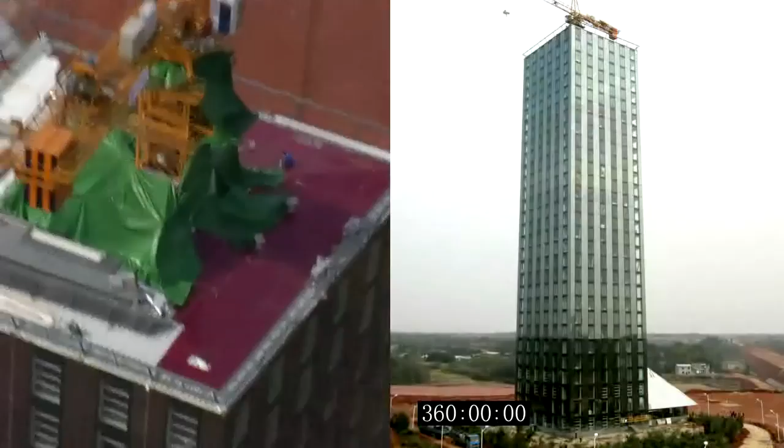That's it. Sounds it works, okay?

This short video, which we put on YouTube, has over 5 million viewers. But much of the attention has been paid to how fast we can erect a building. Here I'd like to take you inside T30, which means at least a 30-story building, and share some story and background behind T30, and explain what we have achieved, and beyond being fast, what we are heading for.

Behind T30 is a long story, very much related to one person: Mr. Zhang Yue, the president and CEO of Broad Group, the parent company of Broad Sustainable Building Corporation. T30 features a new concept of prefab construction and sustainable design.

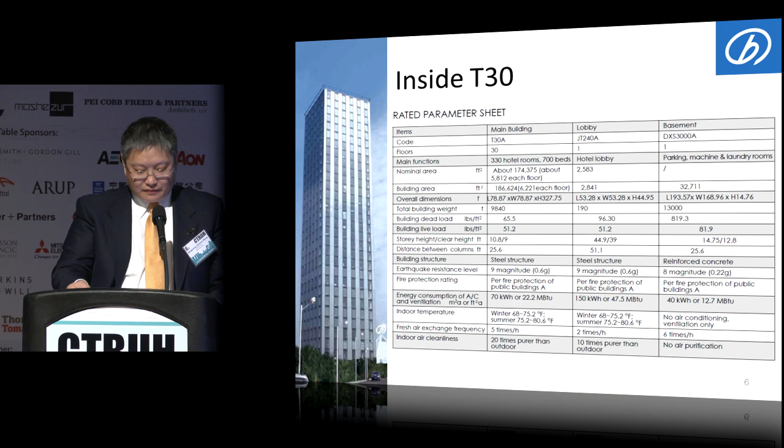That's how T30 and BSB got started. Let's go inside T30. That's maybe my strategy too, because the image of our structure is very simple and plain, not like other presenters who have beautiful pictures. So I choose figures to tell the truth instead of the image.

T30 is a production code. T means tower, and the number next to it means the floors in that building. This slide shows the key index of T30.

T30 consists of 3 main parts: the main building, which serves as a 5-star hotel, the lobby, and the basement. The gross floor area is nearly 190,000 square feet. The basement foundation is not very different from conventional buildings, with typical parking area, machine room, and laundry room. But it saves much more work, load, and construction materials because the main building structure is steel, which lightens the building dead load. We'll discuss the rest of the items later in the presentation.

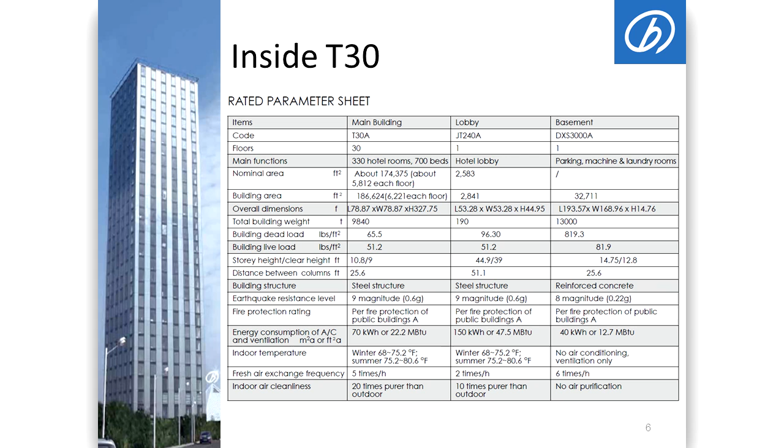Here I've chosen some images of the interior of T30, like this one — it's a hotel guest room. We have 700 beds in the hotel.

Here is the laundry room, basement, parking garage, and chiller rooms. This chiller is a non-electric chiller — it's a CHP cogeneration plant, so basically we use the exhaust to make free cooling and heating. Here's the lobby area, and this is a fitness center at the top floor.

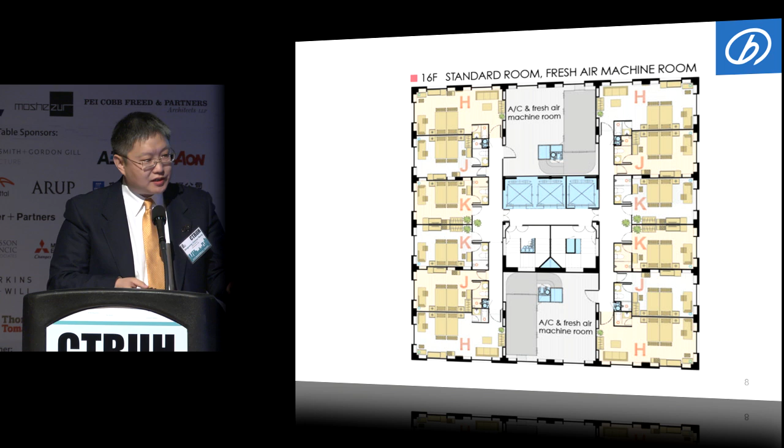Here is a sample for the 16th floor. Here you can see we have garbage classification — I noticed IIT also has this, but we have 8 different garbage shafts: metal, plastic, glass, electronics, battery, kitchen waste, common waste, and paper and cloths.

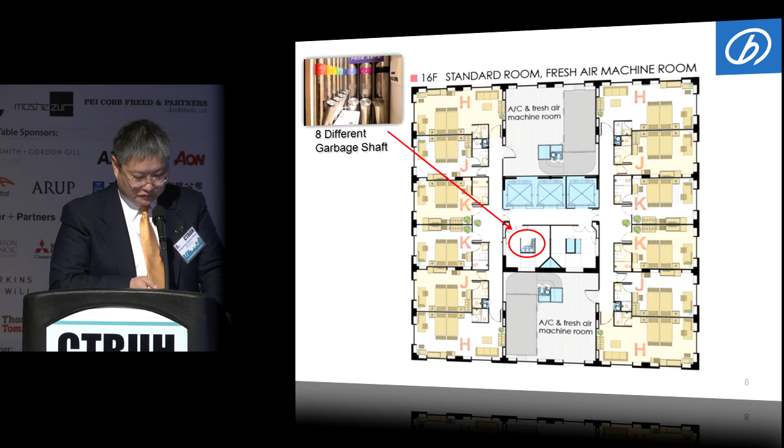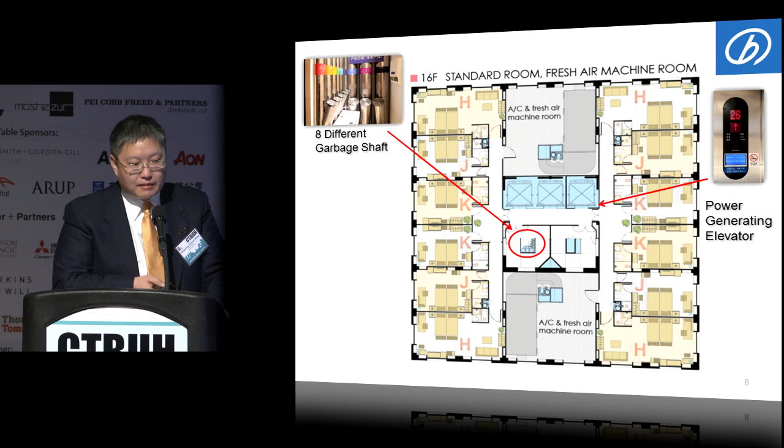Here is a power-generating elevator, which means when moving up empty loaded or moving down fully loaded, it can generate power. Up to the present, it may generate 2,000 kWh.

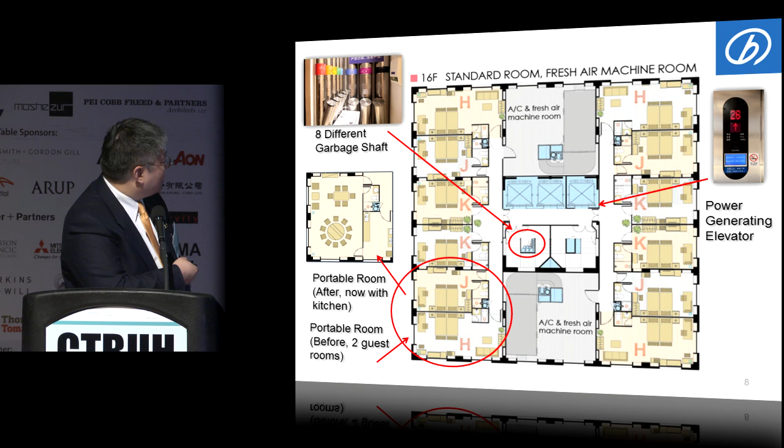Because there are no bearing walls between the rooms, all the interior walls are portable, meaning you can adjust them to any layout you like. We converted 2 guest rooms into a dining room.

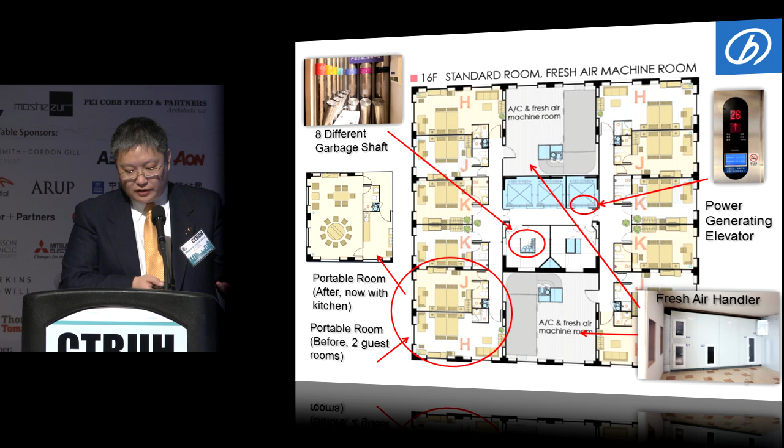Here is a fresh air handler, which is a great piece of the whole HVAC system puzzle. The whole building has 2 units, and airflow is 12,000 CFM per unit, 100% fresh air, no return air mixing. But traditional buildings only have 30% fresh air.

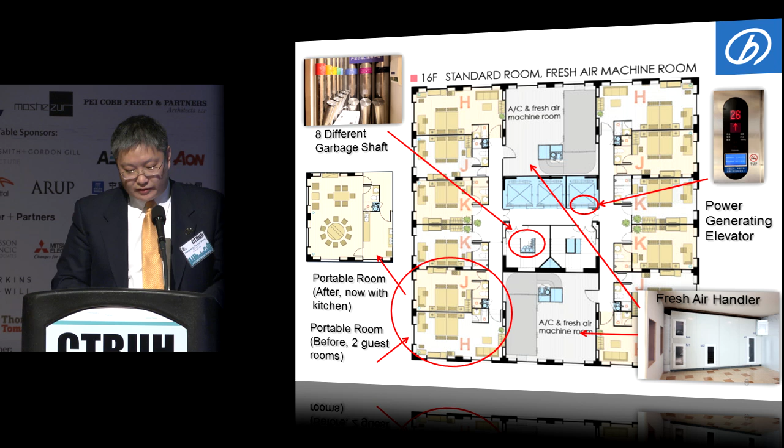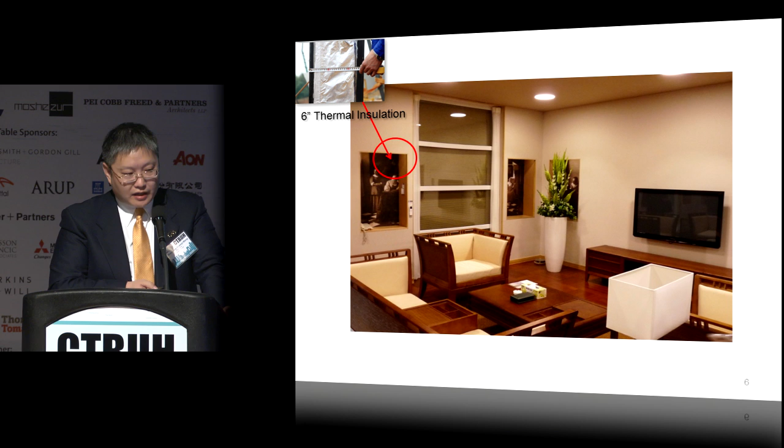Still some nice features here. The T30 building has a high-grade building automation system, and each room is equipped with an air quality master control, which controls dozens of sensors, like interior and exterior curtain sensors. Here's a smart control.

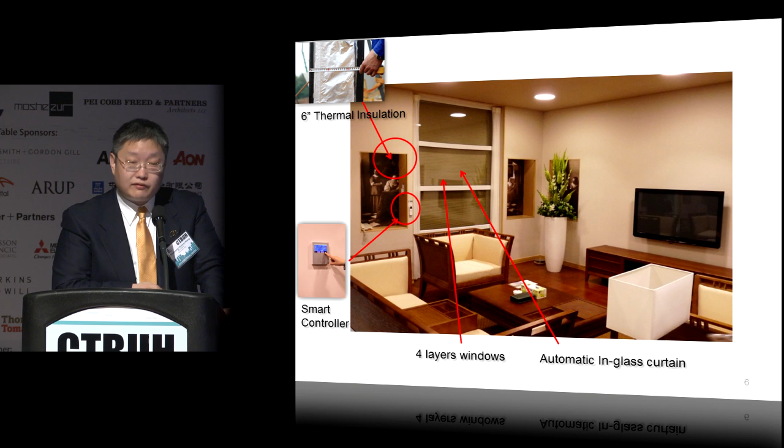The 4-layer windows are why we cannot feel any temperature difference. Here is an in-glass curtain, and also indoor-outdoor particulate matter sensors — you may not be familiar with it, but in China it's a popular term, PM 2.5 — and VOC, CO2, and temperature sensors.

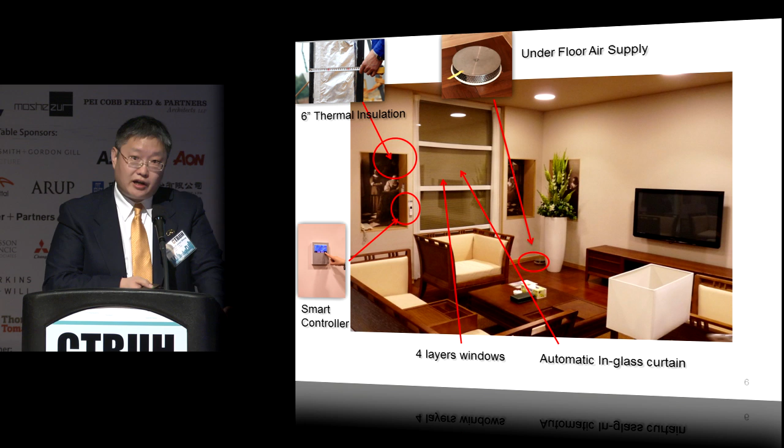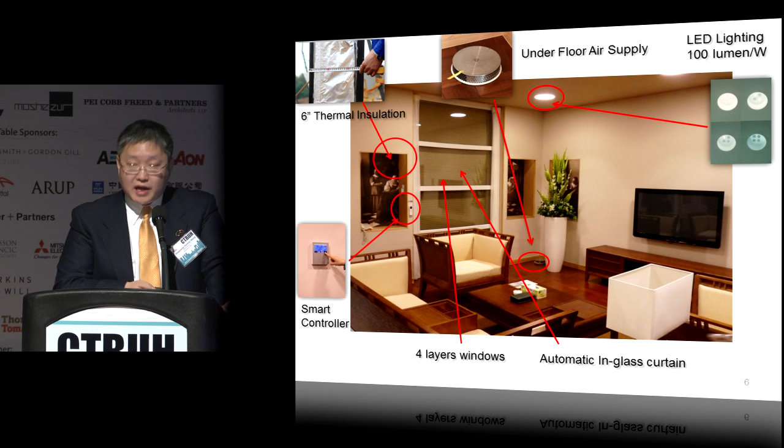Floor air supply and ceiling exhaust in the bathroom provides airflow distance between 23 feet to 49 feet at the longest, effectively preventing air shortcut in the room. Here's the lighting — all LED, and the lights in the room automatically turn off half an hour after the last person leaves.

So I just show you the egg.

Now the chicken. At BSB, BSB stands for both the building we build and the builders who build. The company was established in 2009, located in central China, Changsha.

The central factory of BSB had 6 workshops with 2.5 million square feet at the moment. And there were over 3,000 employees, 6 franchises, mainly located across the country of China.

So far we have built over 30 BSB buildings in the world, and they are diversely used as hotels, dormitories, office buildings, residentials, and conference rooms.

So what's the main technical feature for BSB? Actually, there are too many definitions for sustainability, but our basic principle and concept for sustainability is energy efficiency, 90% factory made, 20 times the indoor air purity than outdoor air, longevity, and durability.

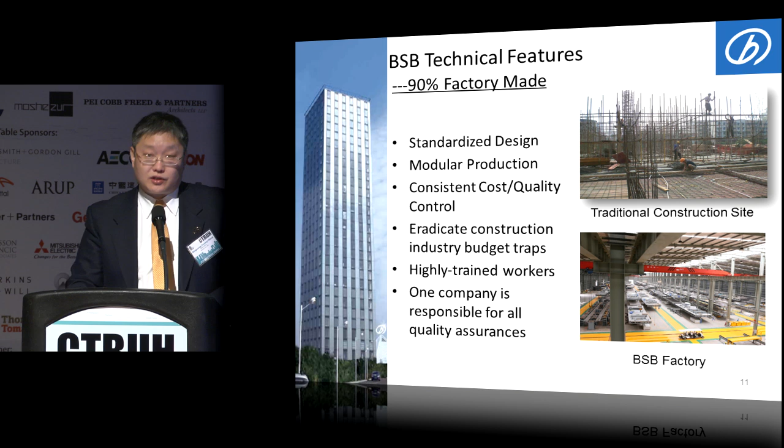In the past, the traditional way to do construction was to outsource to subcontractors. But if something happens, nobody takes responsibility. With BSB, there's only one company you need to talk to.

The core element for BSB is this main plate, as we call it. It's 51 feet in length, 12 feet wide, 1.5 feet in height, and covers an area of 650 square feet. This is a basic model for our building, and one truck can deliver 2 main plates to the construction site.

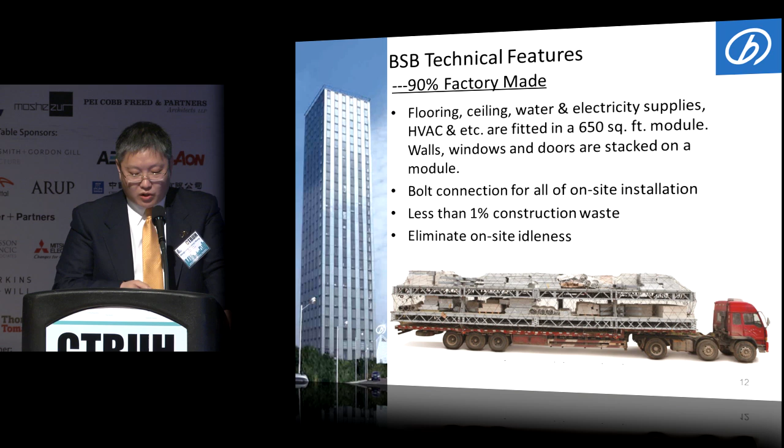The workers on site just need to bolt the connections together, no fire, no water, no dust, no welding, no polishing even. Such high efficiency makes on-site installation account for less than 10%. So BSB can achieve over 90% factory made, which I think is the highest record of prefab worldwide.

5 times energy efficiency, as I said. BSB adopts at least 30 different energy-saving technologies. Ordinary people can understand the thick thermal insulation of the exterior wall, multi-pane windows, external solar shading, heat recovery fresh air, and LED lighting. All these can be implemented in our building.

Another significant energy-saving technology is the heat recovery fresh air system, which exchanges heat between outdoor fresh air and indoor exhaust air, recovering 70 to 90% of energy. Compared to common ventilation, it uses less power or energy than the normal one.

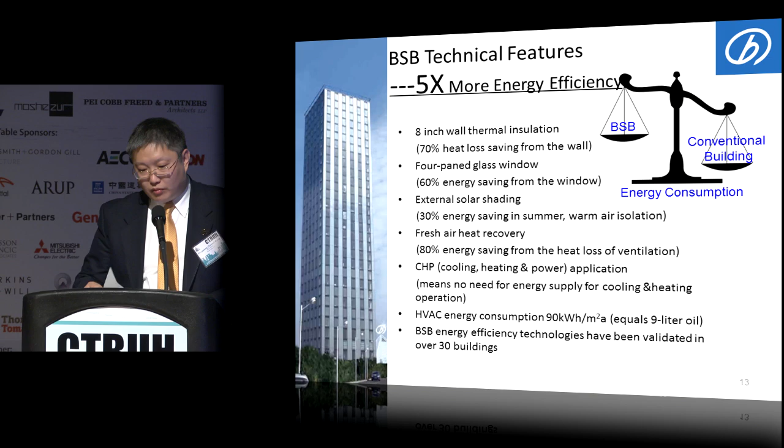Here's another set of figures and facts. There are too many things, but I still want to emphasize HVAC, because we stem from HVAC, so that's our emphasis.

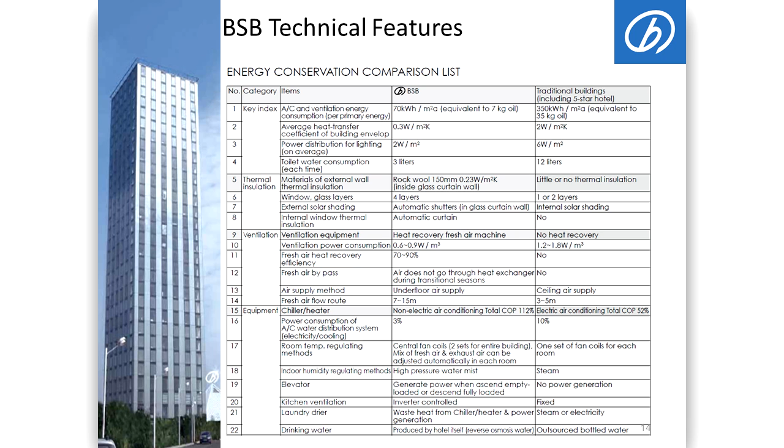And earthquake resistance, yes. Some comments from viewers say, oh, it's built so fast, maybe it collapses just as fast. But here I can give you an answer. We developed this sustainable building due to a disaster, the Wenchuan earthquake that happened in 2008.

It killed 87,000 people. One year after this, BSB did hundreds of tests and invented the integrated earthquake resistance technology, which means the steel structure, diagonal bracing, and lightweight design. The China Academy of Building Research conducted earthquake resistance tests for the 30-story T30, and it proved that our building is 9-magnitude earthquake resistant, the highest record in their research.

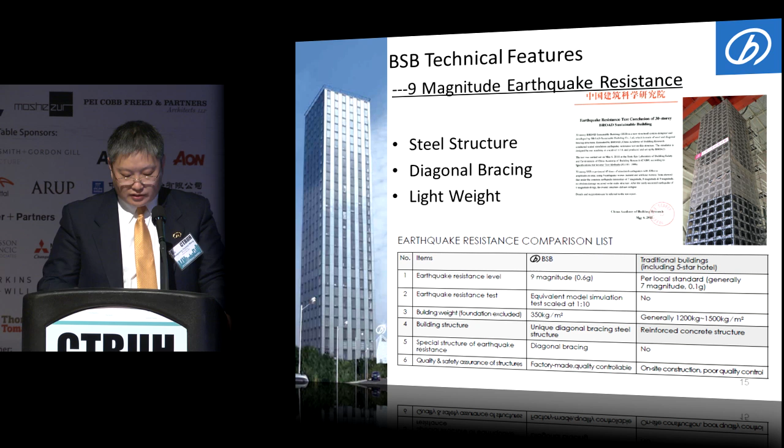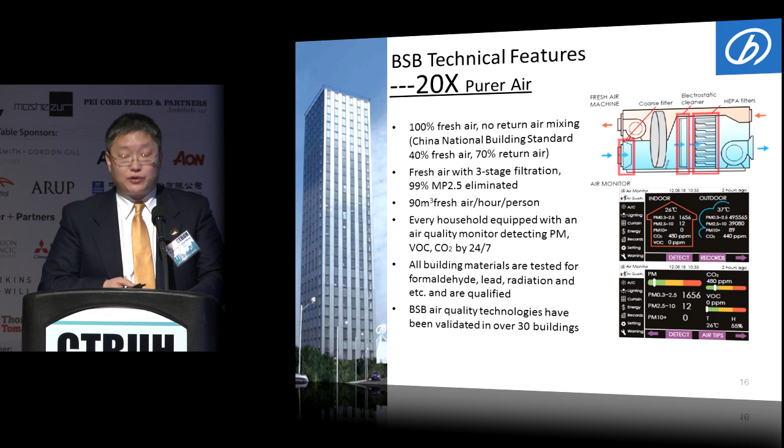20 times pure air, as I mentioned, is also a feature of BSB with superfiltration. We call it 3-stage filtration.

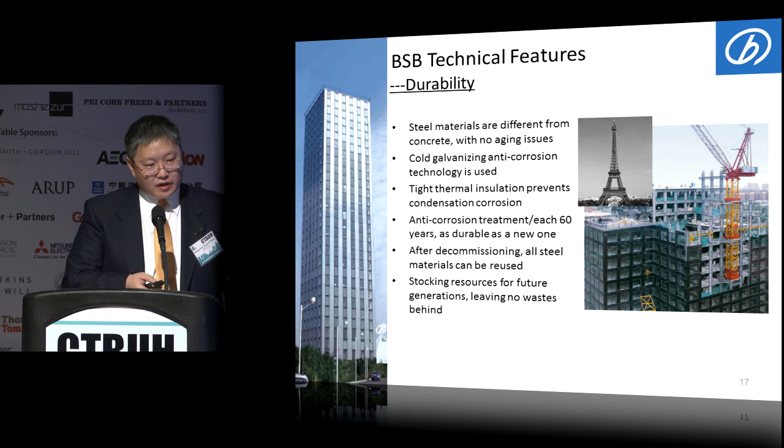Durability for steel structures has been proven long ago by the Eiffel Tower, built 120 years ago, made of iron. We have more advanced technology than that time, so there's no reason to be skeptical about this.

After T30, there are a lot of things we could talk about, but time is up. I'm only going to show you one picture here: J202, which means Sky City. Maybe you've heard of this. We're still in progress.

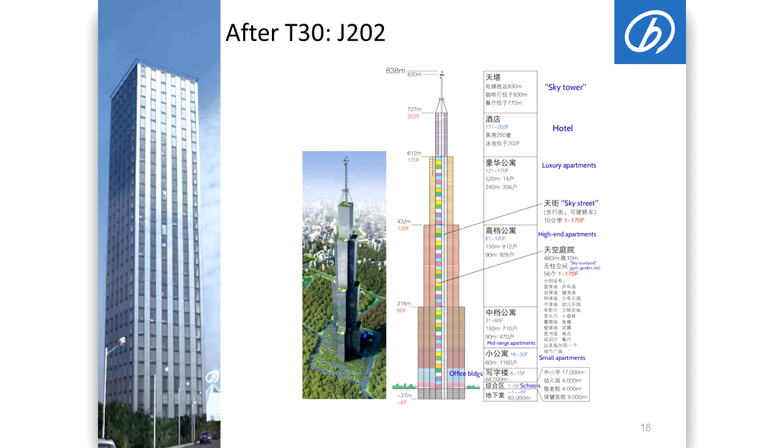I just want you to know our environmental commitment is not only shown in T30, it can be shown in every single building we have built. So if you want to build your own T30, join us.

Yes, that's our business model, to develop local franchisors and producers. And I think only Superman can save the planet by himself, so let's work together.

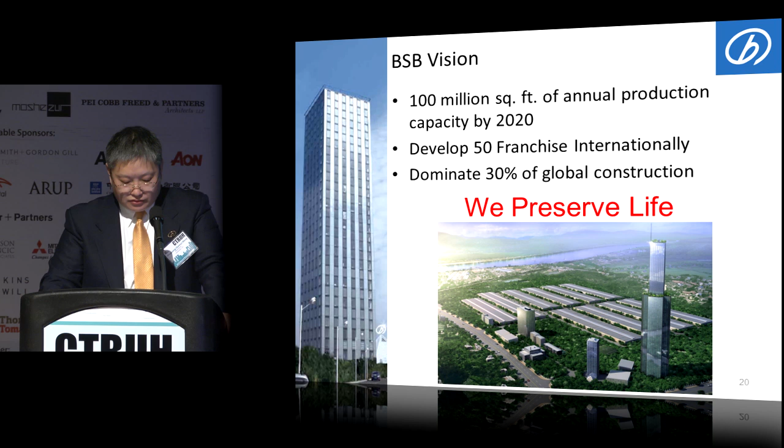The real value based on this is if the mission behind this construction is ignored, T30 can be treated as a dead building. Just like smart control, if nobody cares or uses it, it's nonsense. So again, T30 is not about speed-built building.

It's not about making history or making news. It's about our mission: we preserve life.